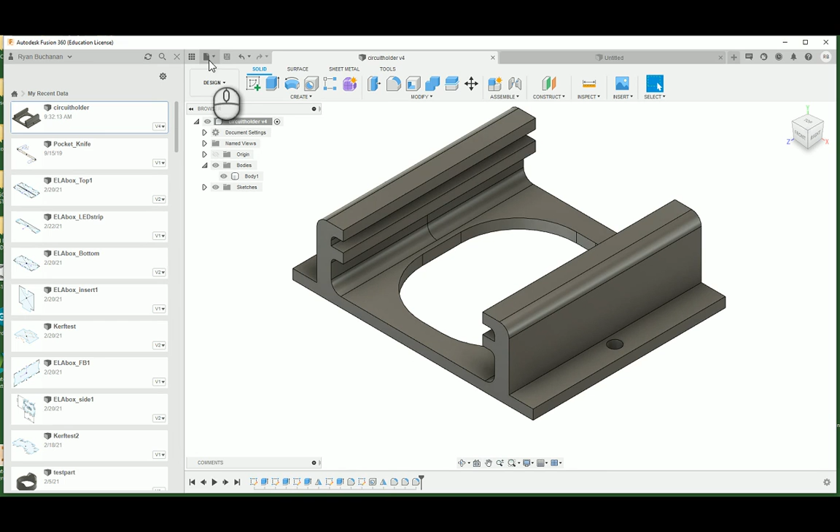Okay, so let's start. I'm going to close down my data panel where all my saved folders are, and let's open up a new design so that we're starting from scratch. This will probably be the screen that you see as you're starting off. To start, let's make a two-dimensional sketch. So there's the sketch button. When you're in 2D sketch mode, you're only going to be able to do two-dimensional things like making rectangles and circles and stuff like that. When you're out of sketch mode, when you hit finish sketch, then you'll be able to do 3D things to these shapes that you're making.

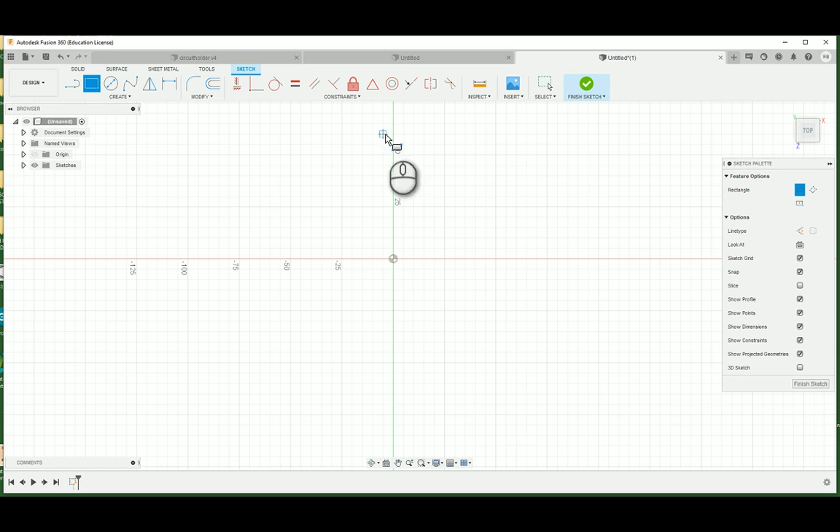So what we're making, we're going to start with a rectangle, except instead of starting with a 2-point rectangle, I want to actually use this point here, the origin, as the middle of my part so that I could use that as a mirror so that I don't need to do everything twice. I just need to do it once and then do a mirror for a few of these features. So what I'm going to do is make a center point rectangle. I'm going to start right in the middle.

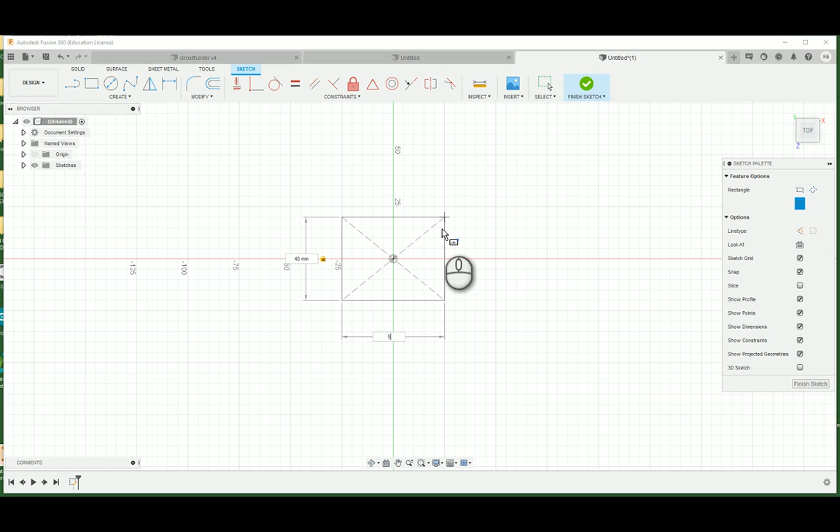And I'm going to be reverse engineering this from a part that I already have. So I'm just going to throw out some numbers at you and get you to follow along. You can type in these numbers as you go. So I'm just going to go 40 millimeters wide. And then I'm going to hit tab. And it's going to be 50 millimeters wide. I guess 40 tall, 50 wide. Okay, so this is how it should look. At this point in time, this rectangle is all we need on this one first sketch here. What you need to do now is just hit finish sketch.

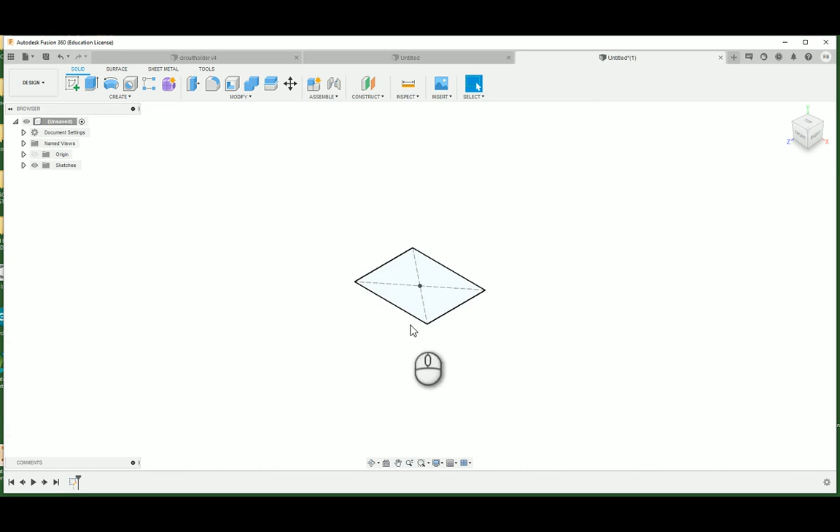So now our view has popped back to its default view. If you start rotating around, and you can rotate by holding shift and use that middle scroll wheel, okay, if you get totally lost as you're rotating around, all you need to do is hit the home button on your little nav ball up here and it will take you back to your home view. That scroll wheel is to zoom in and out as well, so that's very handy for this program.

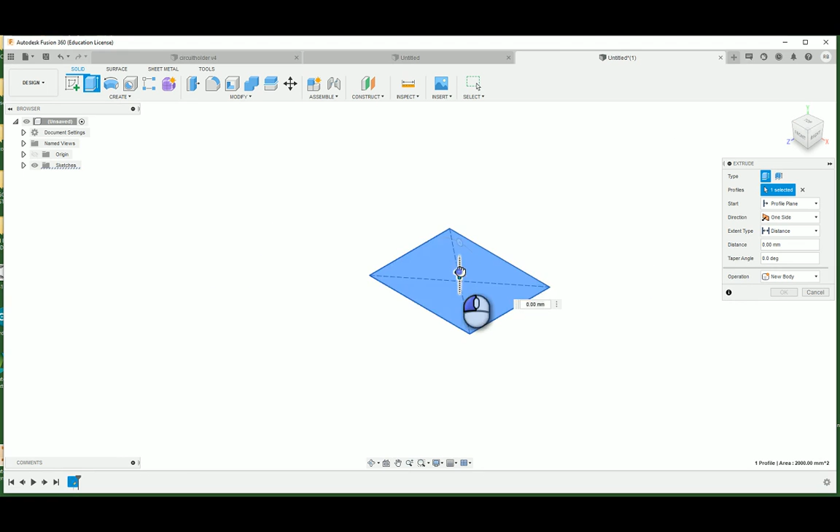Okay, next up, we need to make this part 3D. So this is just a very simple extrusion. So with the extrusion, you could either click and drag and pull your parts up to make a cube or something like that. We just want to make the first part of our box here, which is going to be 2 millimeters tall. That's it. Okay. So now we have a very flat rectangle. Let's just go back to our reference part here. That would be the base here that we've just made. Okay. So next up, back to our other part.

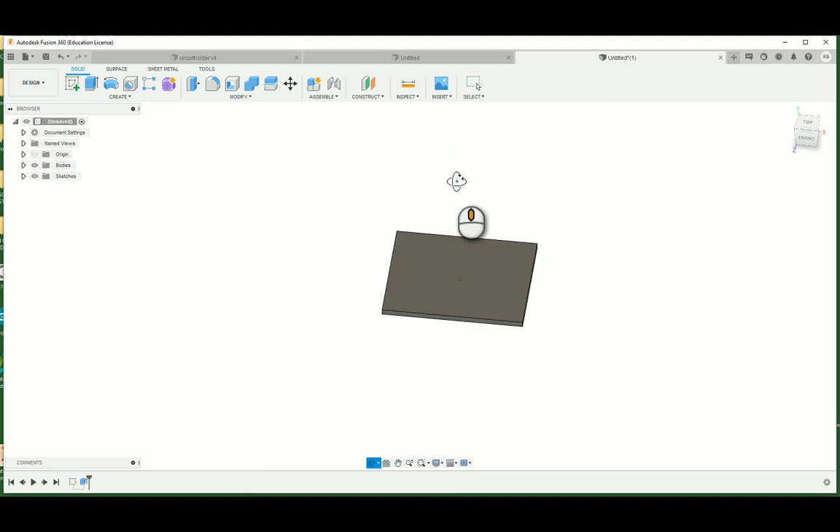Let's make the sides to this now. So with the sides, what I want to do, I want to start with a sketch. And now that we have our 3D part, you can either make a sketch on one of the planes, or we could just do it on top of the surface here of our other part. So try to click on the surface of your part here so that we're drawing on top of this part.

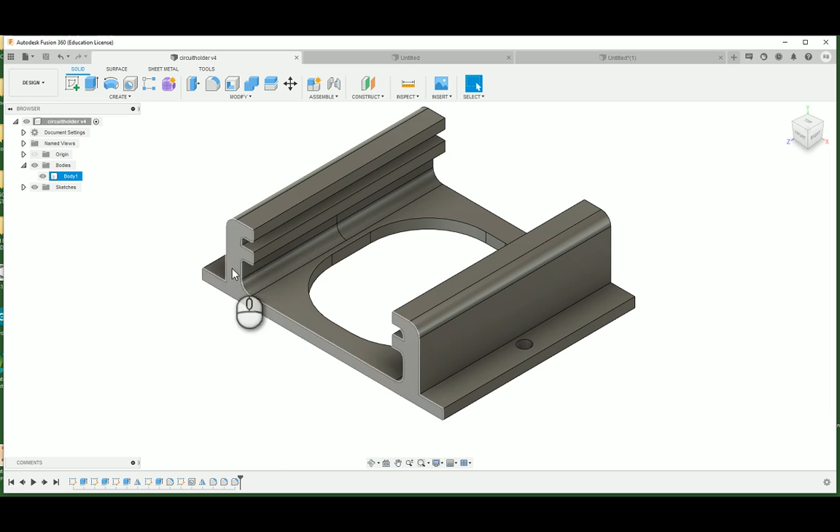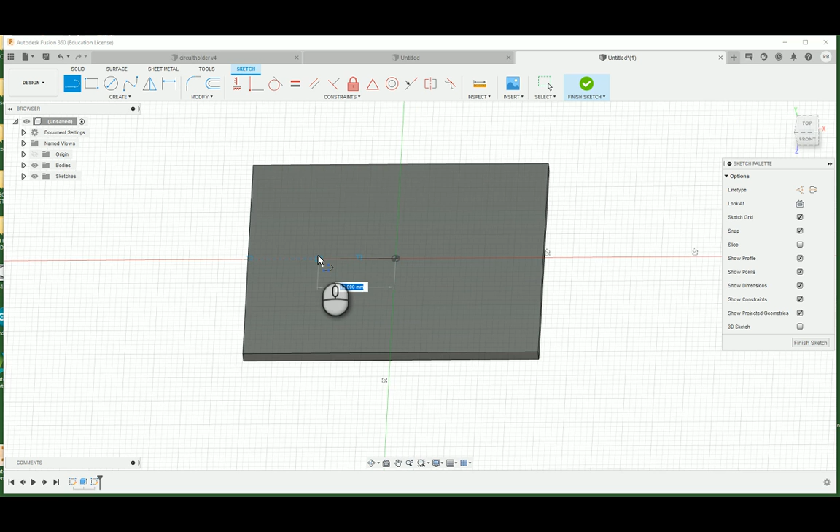Now, making a sketch, what I want to do, I want to measure out exactly how far away these uprights are going to be. That's what we're going to make next. So I want this to be centered. I want everything to be centered in this part. I want these to be a certain distance away from the center. So to do this, I'm going to make a line right now. And this line's just basically going to be a layout line. So from here, I'm going to go over, and this one's going to go 17 millimeters over. Okay? From that point there, 17 millimeters over, I now need to make a rectangle here.

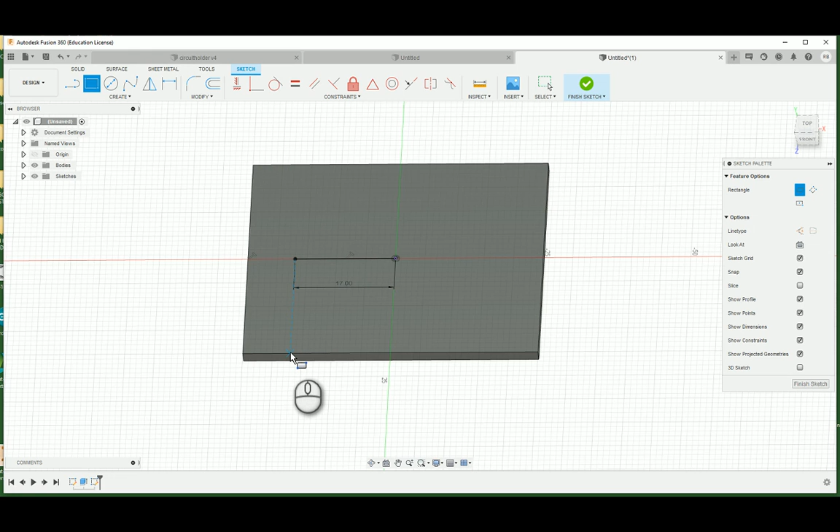So we could do a 2-point rectangle. And from this point here, if you just kind of hover over this point and then move your mouse, I'm not clicking right now, I'm just kind of hovering. Okay, you see how you have this dotted line? That doesn't mean we've drawn a part in yet. I'm just using this as a layout. So click when that X is there on the line, drag it all the way up over to the other side here.

I want this one to be the entire width of the part, and it's not snapping to the line unless you go right on that line there. So I want it to be 40 millimeters by 3. If it doesn't make it what you want, just type in 40 tab 3 and enter.

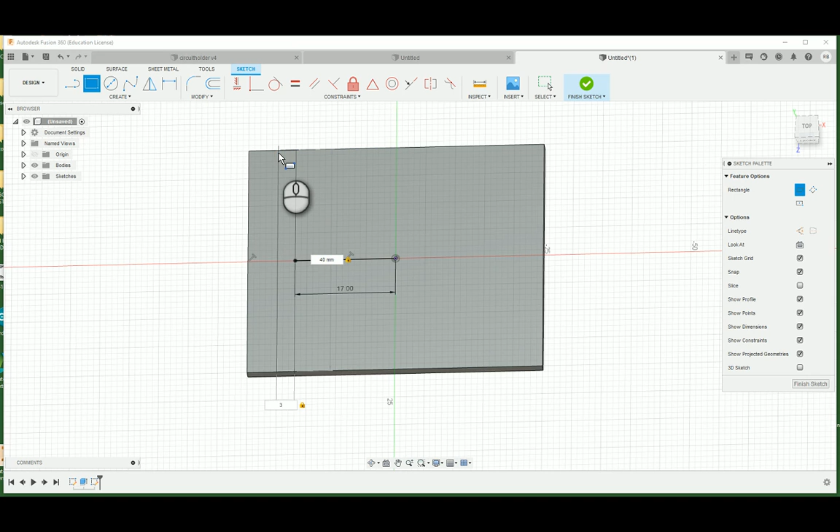Okay. So now we've got this thing. We need to make the same part on the other side. Except what I'm going to do, instead of making everything twice, I'm going to mirror everything after the fact. So right now with this one sketch, I'm just going to finish it. And then this part is going to get extruded.

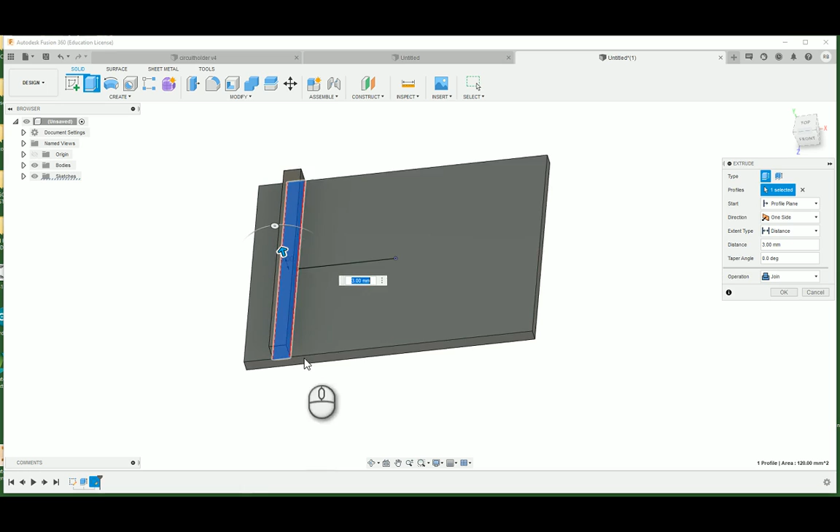And let's pull this up. Forget exactly how big it is. Let me just double check for a second. Going to inspect from, say, that plane to that one up there. It's 12 millimeters, so we're going to be going up 12 millimeters.

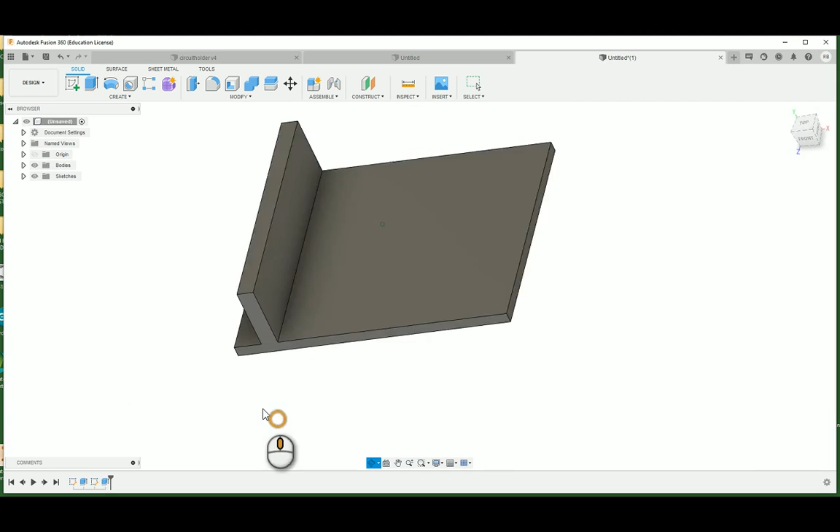So, oops, it finished my extrusion. So I'm going to edit this, do it again. Instead of 3 millimeters, I want that to be 12 millimeters up. Perfect. Okay, now we're starting to get there.

Next up, I need to make a couple of the parts that actually hold it. These are another couple little rectangles that we're just going to be extruding out. So back to our part here. I'm now going to make a sketch on this surface. Going to make another rectangle. It's going to go all the way across.

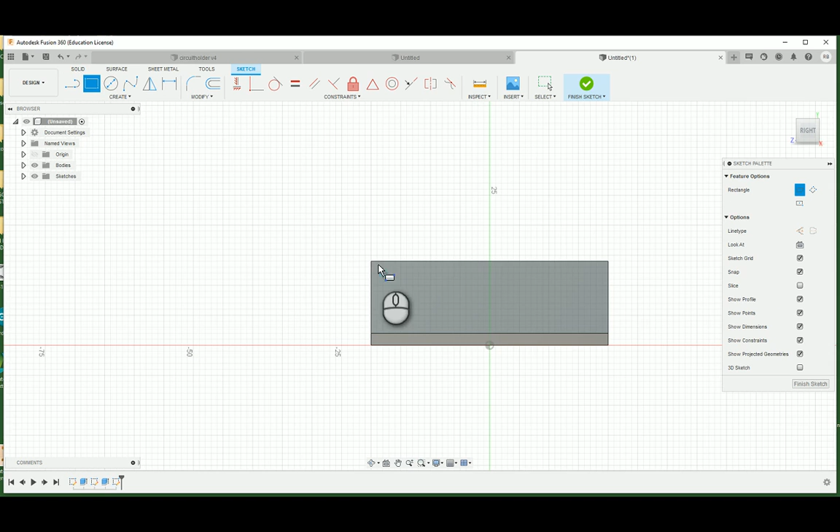So I want this one to be 2 millimeters tall. So I'm going to type in 2 tab 40, enter. That makes that. I'm going to make another one. Very similarly, the gap needs to be 2 millimeters in here.

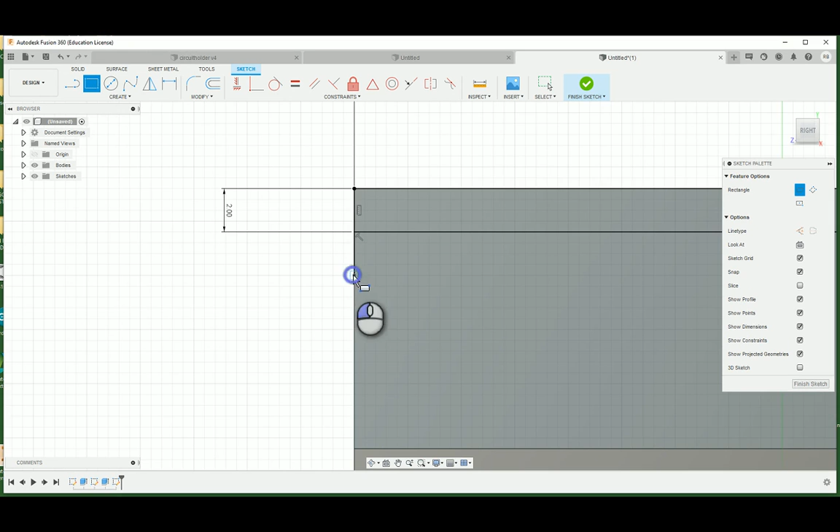So what you could do to make sure that that gap's going to be 2 millimeters, just do a little construction line, 2 millimeters, okay, and then start a 2-point rectangle from that point that you just made, and pull it over to here, 2 by 40, perfect. Okay, finish the sketch. We now have, looks like 3 rectangles actually.

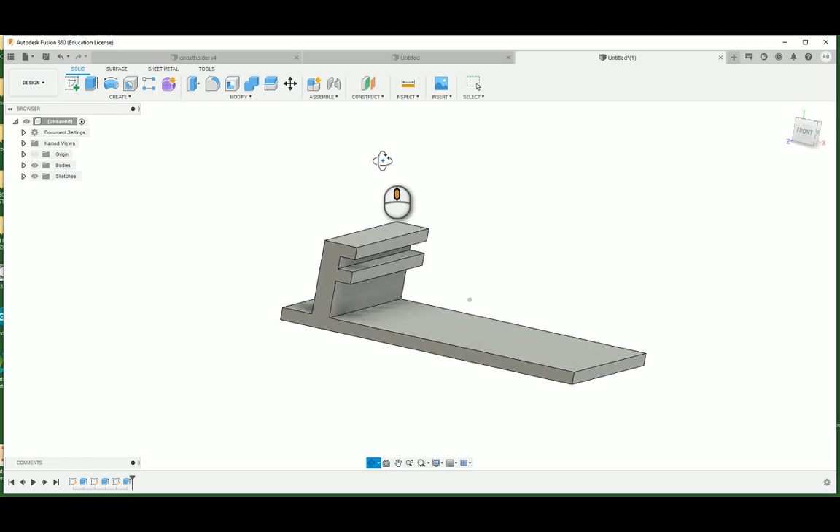But what we're going to do is extrude this one and this one. Just click on both. And let's pull these out 2.5 millimeters. Okay. Now we're starting to get closer. At this point in time, this shape is sort of basically what I want it to be.

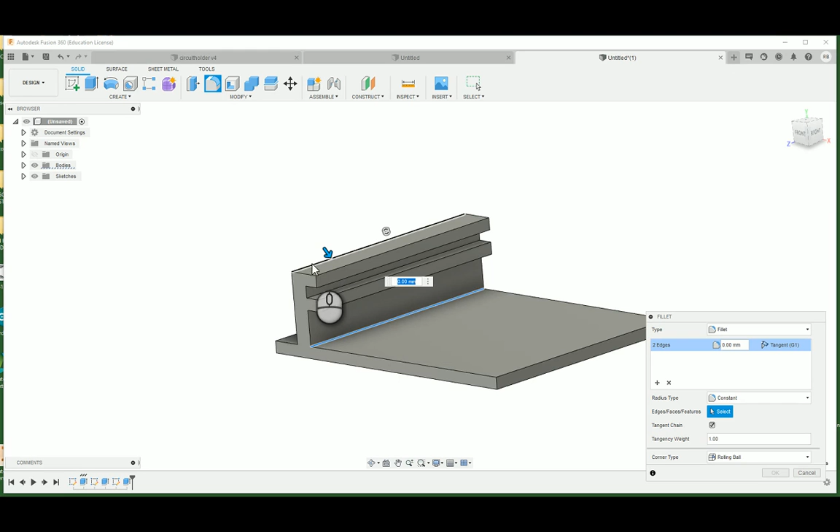But I want to add a couple of what's called fillets to it. So what a fillet does is it just adds like a neat little round over to a certain corner. So I'm going to do 2 different fillets here. This corner, the inside corner, and this top corner up here, you need to click on the edge. We're going to give them a 2 millimeter fillet.

And you see what that does is it gives you like a nice little round. Basically what this does is it helps your 3D printed part have a little bit of strength here. And this top part here is going to look a little bit less wonky. Let's do another fillet as well.

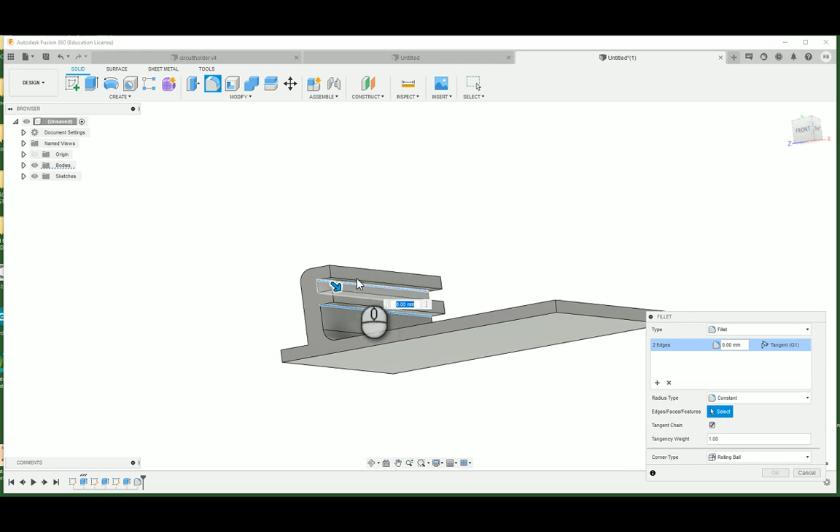And what this one's going to do, it's going to help us hold in these 2 little sort of tabs that's holding our circuit in there. I'm just going to give them 1 millimeter apiece. Okay, so now we got this nice little rounded kind of F shape going on.

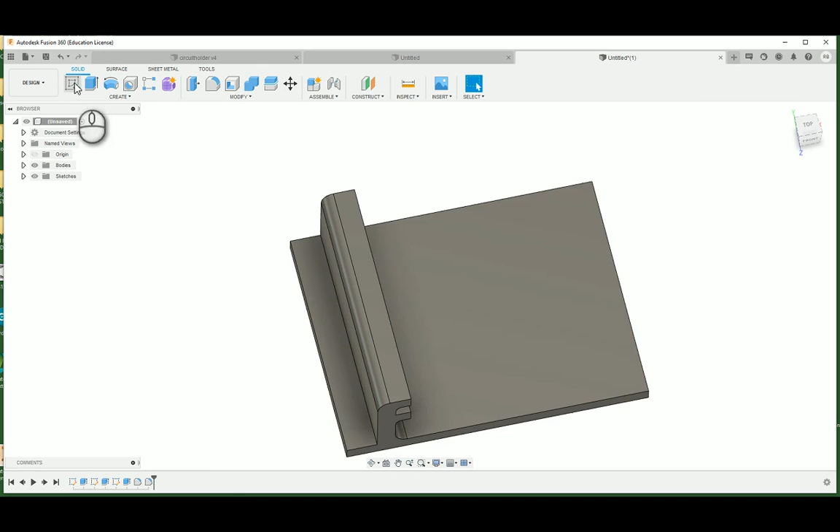Okay, another thing that we need to do, we're going to need to make a hole around about here because this circuit holder needs to get screwed into the laser lantern. So let's make that. Again, we're measuring from the middle of the part here. So make another sketch on your part. The origin's right there, so it's really easy to make this work.

We're going to make a line. The holes on the laser lantern are exactly 44 millimeters apart. So half of 44 is 22. So right there, you could just plunk your line down. You really don't need to put a line. All that we need is a point, really.

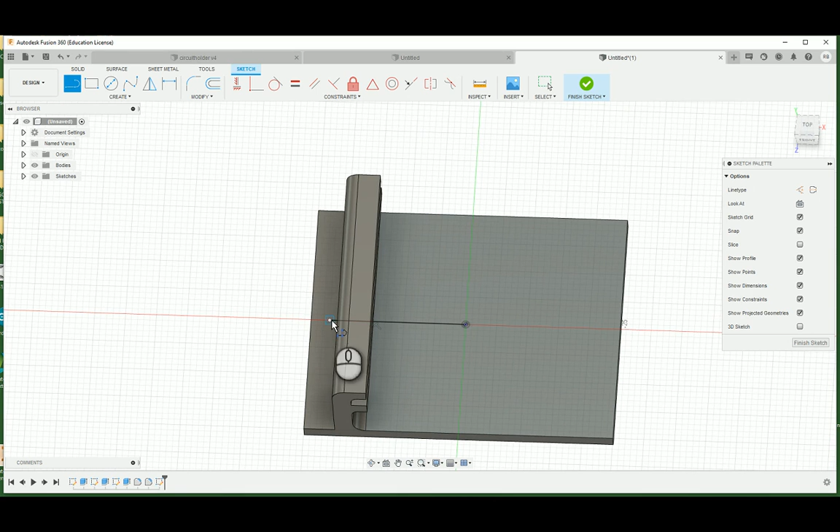So finish that sketch. And that point there, you could either draw in a circle and extrude the circle out, but you could also just make a hole. This is a fairly simple tool to just plunk a hole through the things that you want. Let's make the hole 2.5 millimeters wide. And that looks good just the way it is.

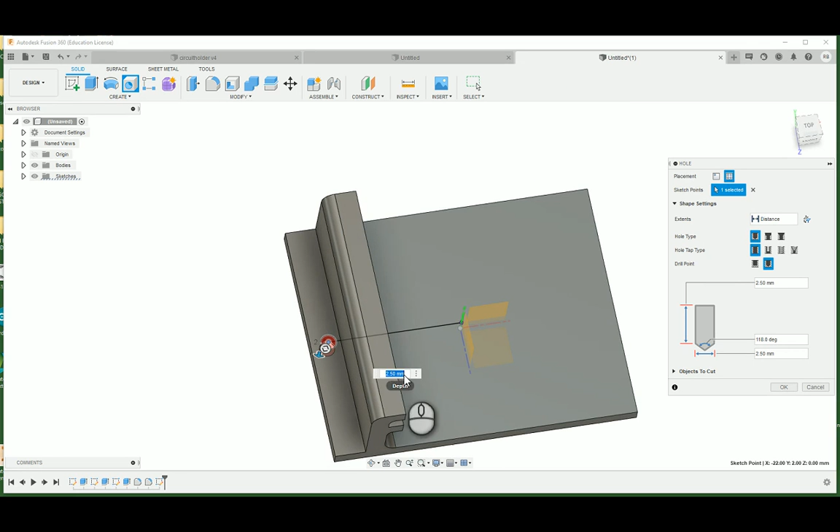So if you don't have that right size in there, you can just, oh, that's the depth. The depth doesn't really matter. What you want is the diameter of the hole. This one is the one that we want to be 2.5 millimeters. Okay.

All right, so we've basically got half our part now. The only other part that I haven't drawn in yet is this big circle in the middle. We'll draw that one at the very last step. What we're going to do right now is mirror everything. So what we need to do is go underneath Create. There is a mirror button.

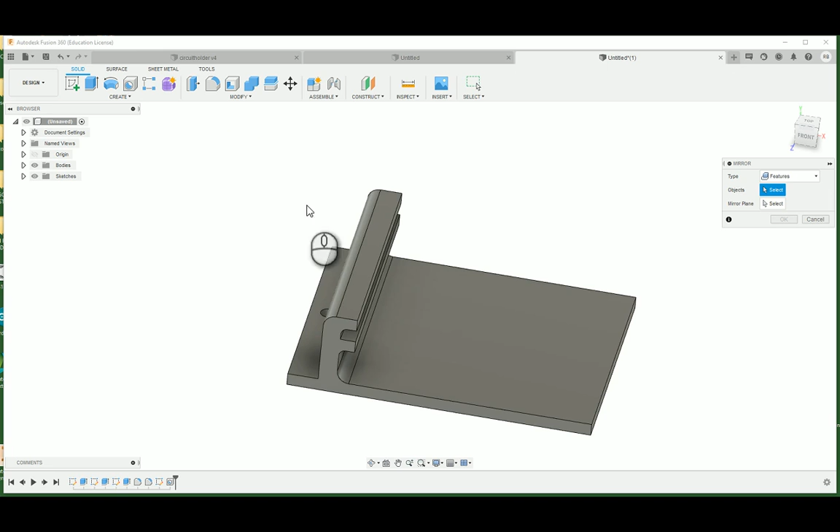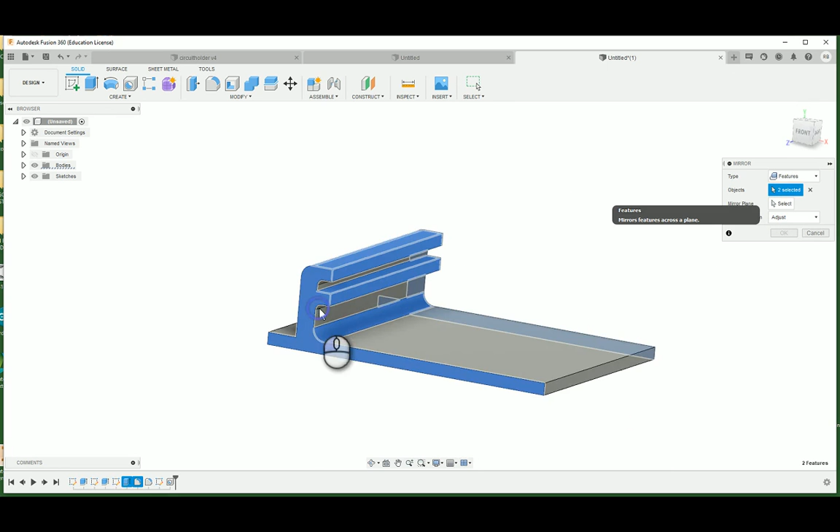And there's lots of different things that you can mirror. So you want to make sure that you're on mirroring features, because a feature is something that you've kind of added to a body. So all of this extrusion, the fillets that we've added in here, and the hole, see if we can get this all at once. These are all features that we want to mirror. And the mirror plane, you need to select this. We're going to do it on this plane here.

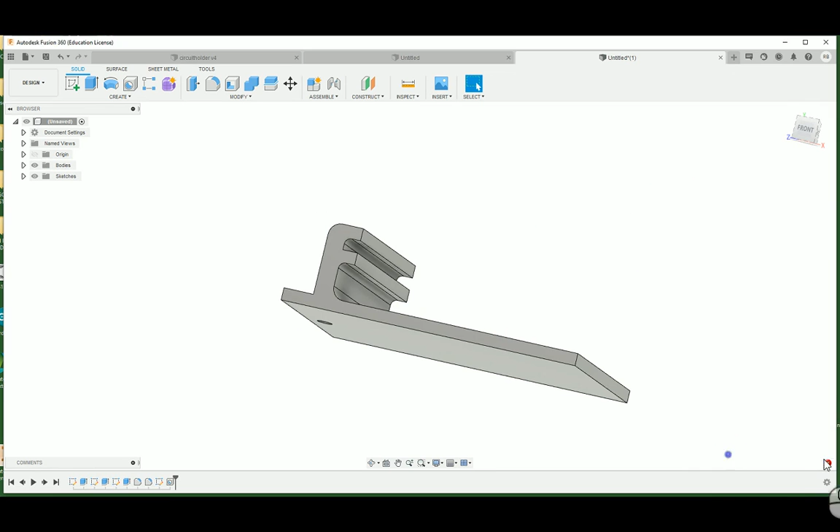Now, if I did everything correct, of course. Try it again. What's the error? Compute failed. Sometimes it doesn't like to mirror the fillets, so maybe we'll just need to suppress them for a second and just not mirror those. Let's try it again. Mirror. We're going to mirror this feature on this plane. That worked.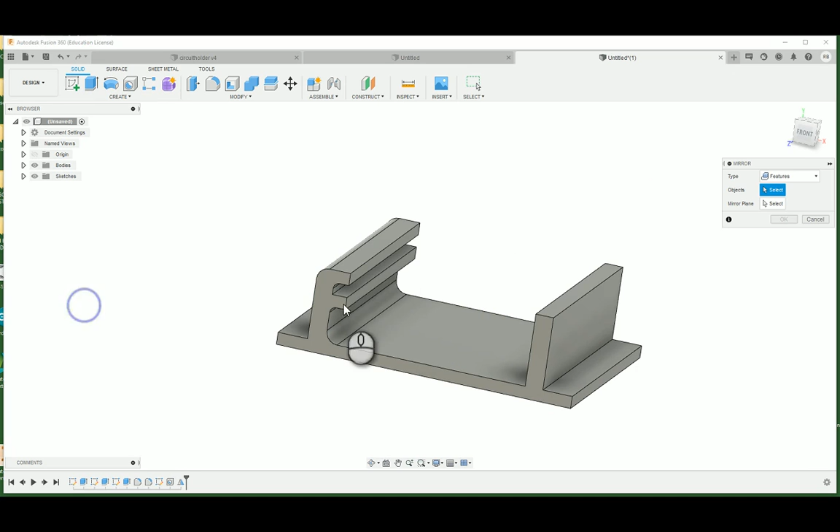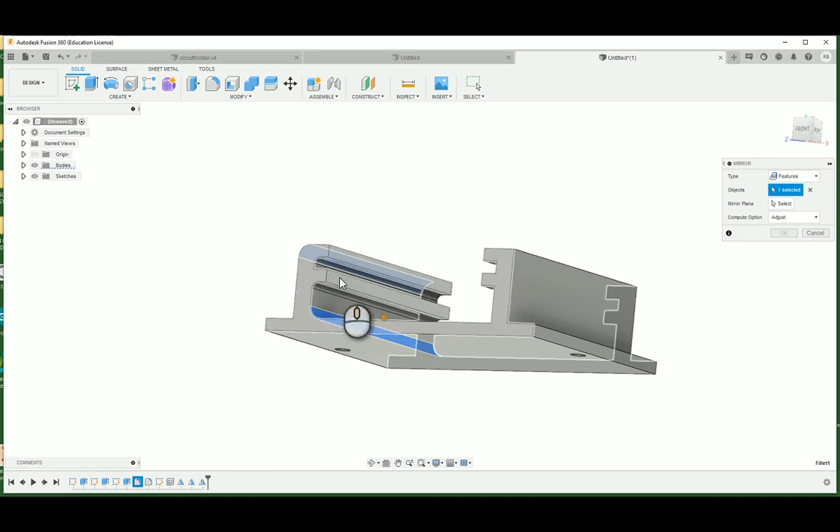Try it again. We're going to mirror these features on that plane. Okay, I can figure that out. We're going to mirror the hole on that plane. Yeah. So then let's mirror the fillets on that plane. I just can't do that. Okay. Well then put in the fillets yourself.

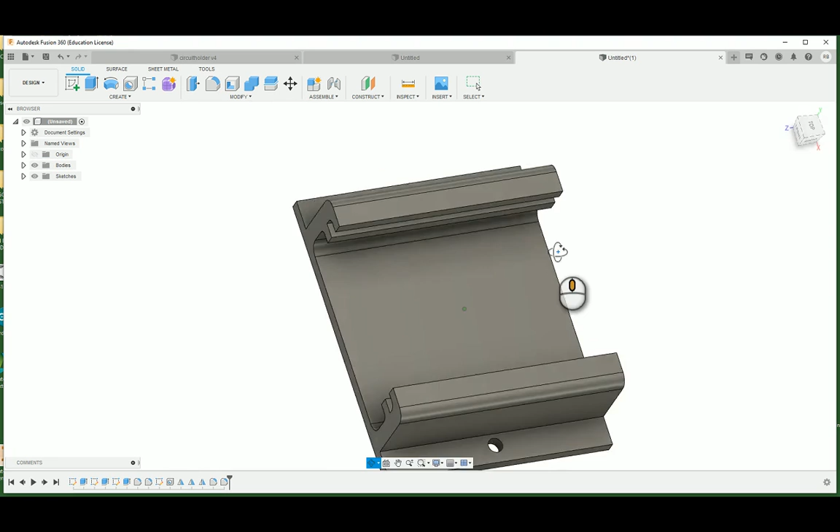That would be this one, and this one are going to be 2 millimeters. And another fillet. Let's rotate around so we can see this line and this line are going to be 1 millimeter. Voila. Now, very close. All that we need to do is one last little thing. We need to put a hole in this part here. Let me just double check, see what the size is. I'm going to inspect from this side to this side. That one's 32. And from this line to that line, it's going to be 28.

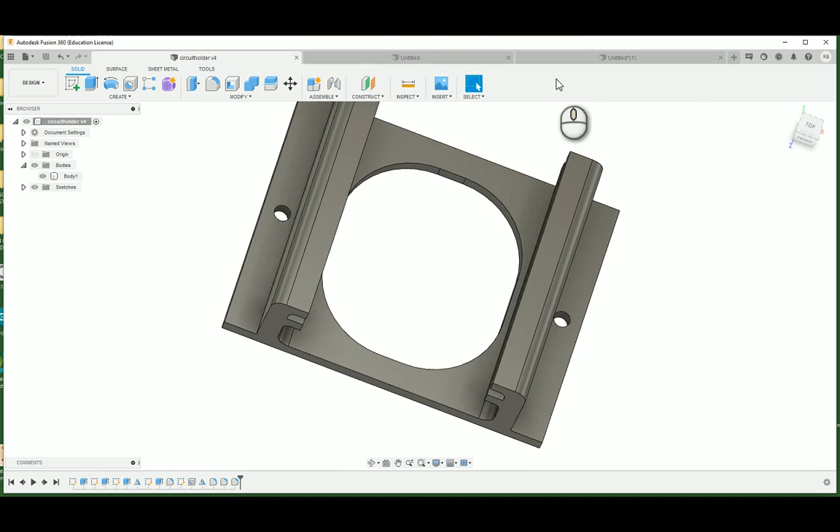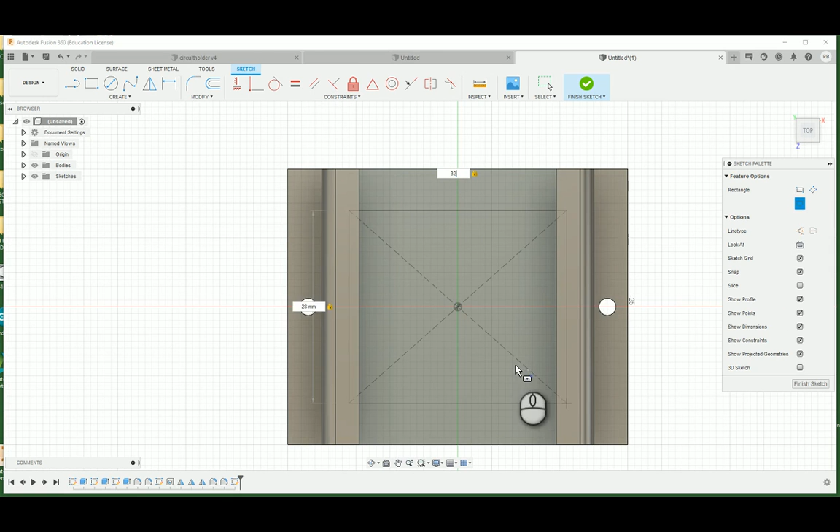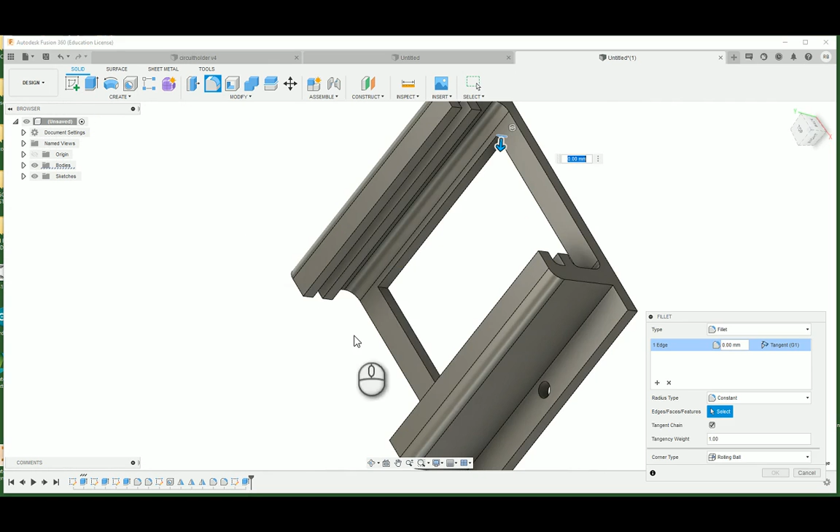And we're going to add a few very simple fillets into these little corners here so that our shape doesn't look so square and blocky, and this is also going to help the 3D printing process. And these ones are going to be 12 millimeters. Voila! And we have our part. I think I did it in more steps this time than I did the last time. Still a fairly basic part. It's just basically a bunch of sketches and extrusions.

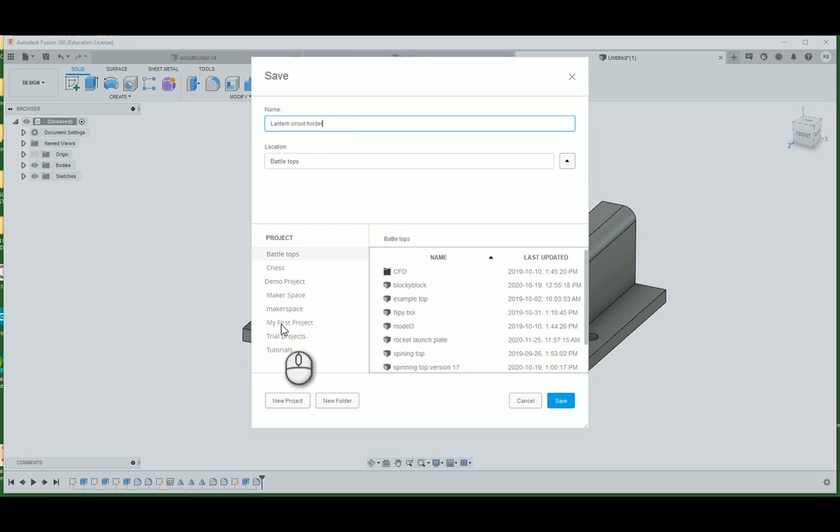So at this point, what you're going to want to do is save it as a Fusion file. So I'm just going to call this lantern circuit holder. Doesn't really matter which folder I save it into. How about my first project? Sure. Now what I've just done is I've saved a version for myself to work on later on. This isn't quite the version that we want to print though. The thing that we need to actually print is a simplified version of this shape.

So the way to do that, if you go into bodies, click on the little arrow beside it, and right click on body 1. This part needs to be saved as an STL. That's a very simple type of a 3D shape that the 3D printers can understand. So hit OK. This pops up. Save it as something. We're going to call this lantern circuit. Close enough, sure. Okay.

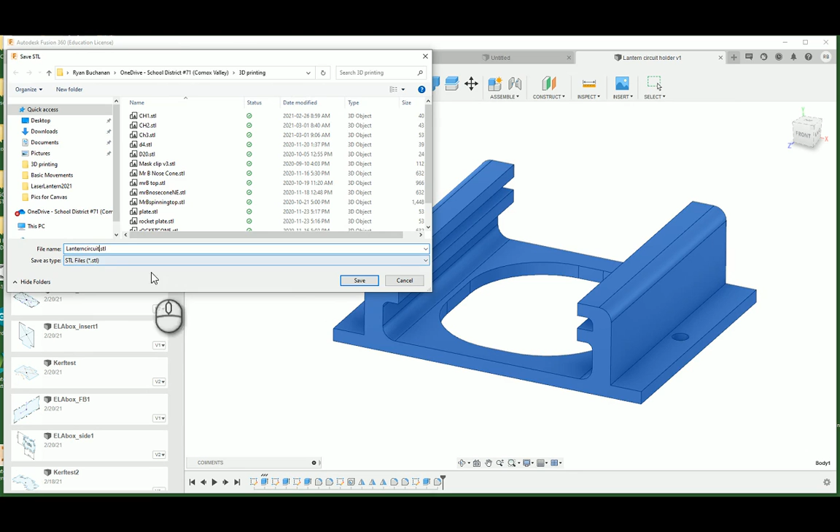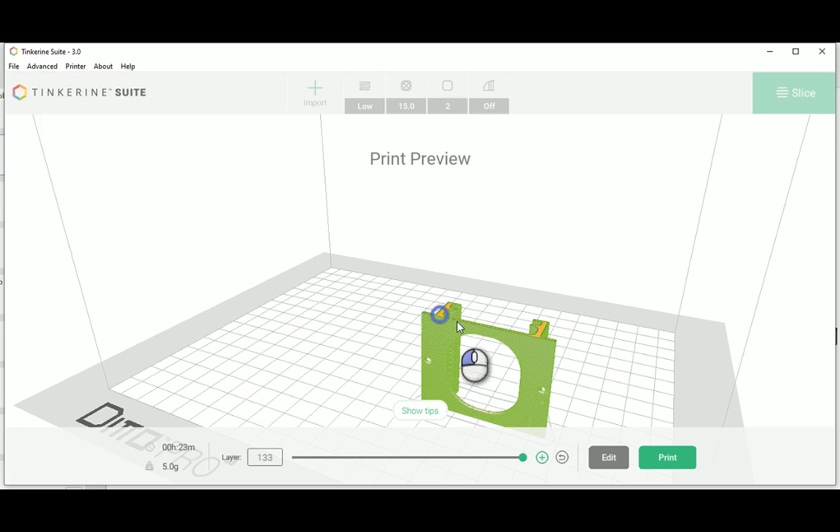Now the last step would be to actually slice your part. I have other videos for this one, so I'm going to cut this video off here. But the basics of slicing a part is that you need to open a program called either Tinkerine Suite or Cura. It depends which printer you're going to use. So let's pull this in and start a new project. You would basically just import your part. Find your part. It was lanterncircuit.stl. That's the one. Your part's going to come in here.

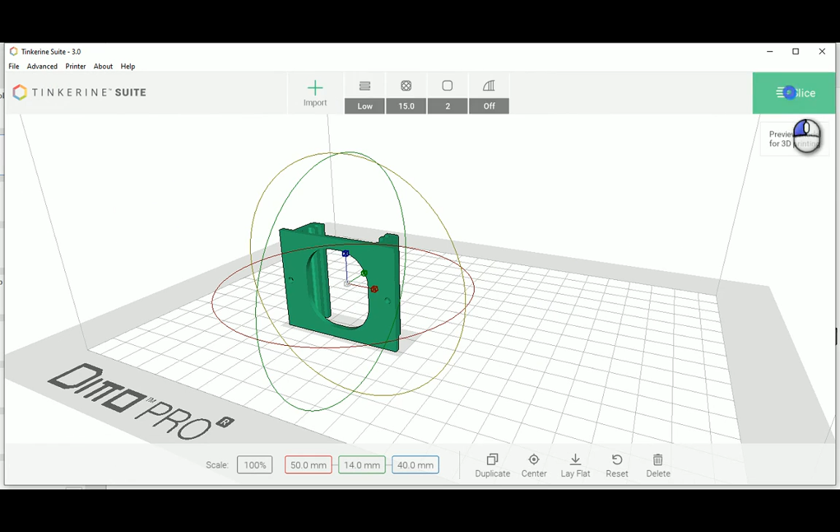You need to print it in the middle of the bed. That's an important thing. You should check all of the settings before you hit go, like call the instructor over before you do that. But basically at this point you'd be hitting slice if everything is correct. Once it's sliced, you can see a preview of what's going to be built layer by layer. If it's going to respond any day now. There we go. So there, layer by layer is our part getting built up.

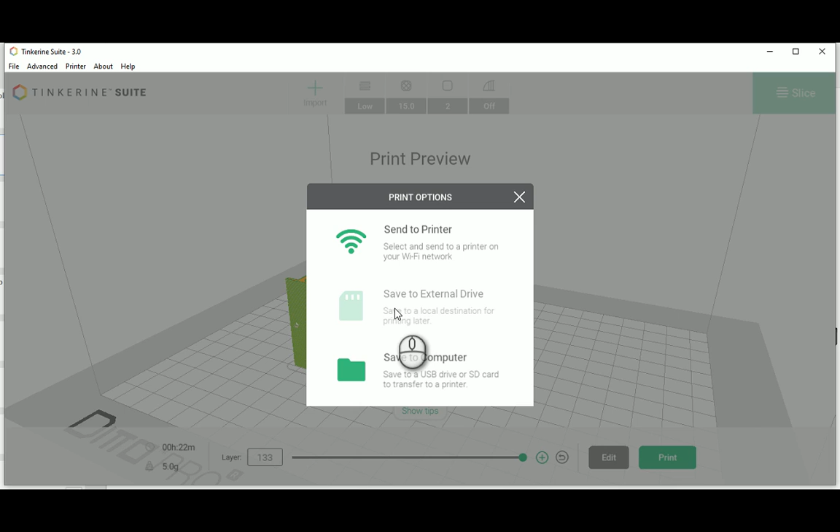If you had a card, you would just put the card in the machine, and then this little button would show up, save to external drive. You just click that button, and then take the SD card, put it into the printer, and hit print. Simple as that. All right, I hope you enjoyed this tutorial.